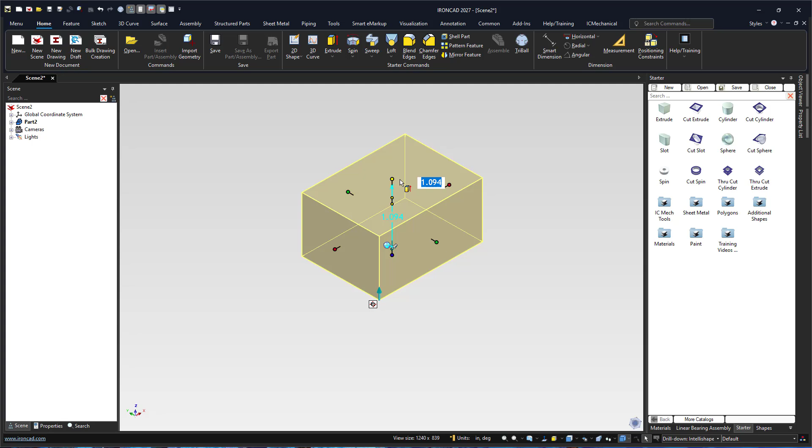Today we'll be continuing our IronCAD series where we're designing a linear bearing. Today we'll design our fourth part called the pillow block. To begin, we'll bring out an extrude block and we'll adjust the total length of this block to be 2 inches, the total width of the block to be 1.5, and the total height of the block to be 1.06. So this will give us the base.

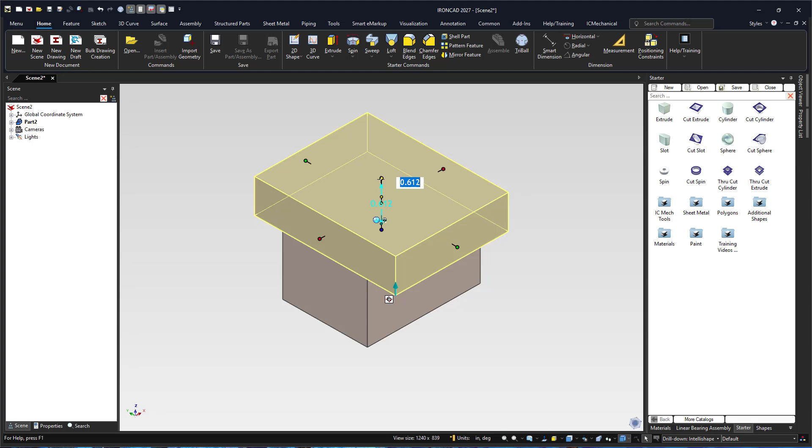And so what we'll do is we'll bring out an extrude block. We'll adjust the front and the back to be flush, and then we'll bring out this top block to be 2.5 inches, and then the total height will be 0.19 inches. So this will give us our overall base for the pillow block.

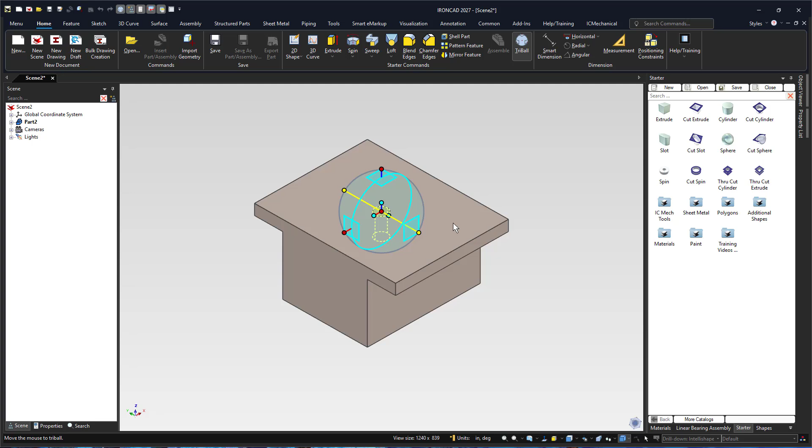What we'll do now is we'll go to the top view and we'll add a cut cylinder here. This cut cylinder needs to be 0.22 inches. We need 4 of them. So we'll move this hole to the correct dimension. We'll hit edit distance to point. So from this right side point, this hole needs to be 0.25. And then from this front face, this hole needs to be 0.25 as well.

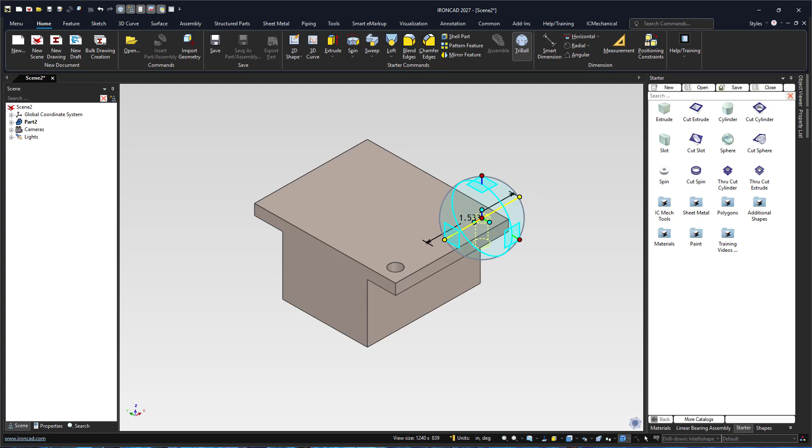And then what we'll do is we'll use the tri-ball. We'll hold the tri-ball in and we'll right click and drag. This hole needs to be copied at 1.5 inches. We'll take both of these, we'll bring down to the middle, and we'll mirror on the other side.

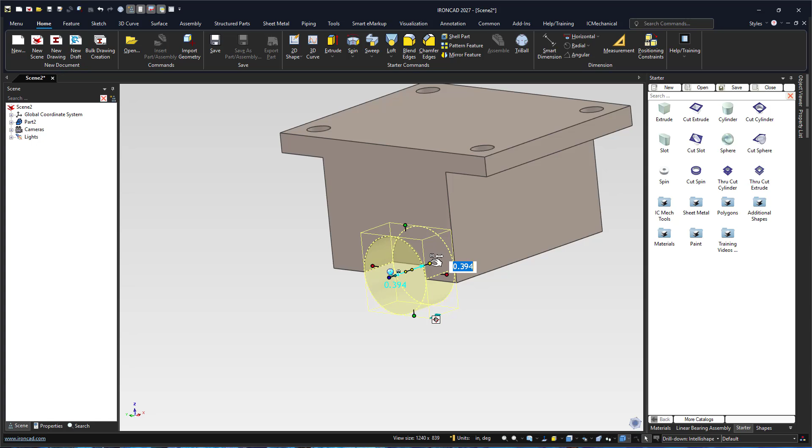Lastly, what we'll do is we'll add a cut cylinder here to this middle point. We'll adjust this cut cylinder to be 0.75 in diameter. We'll have it go all the way back to be flush with the back face. We'll open up the tri-ball, and from the top face, it needs to be 1.06. So just like this. So this is our pillow block.

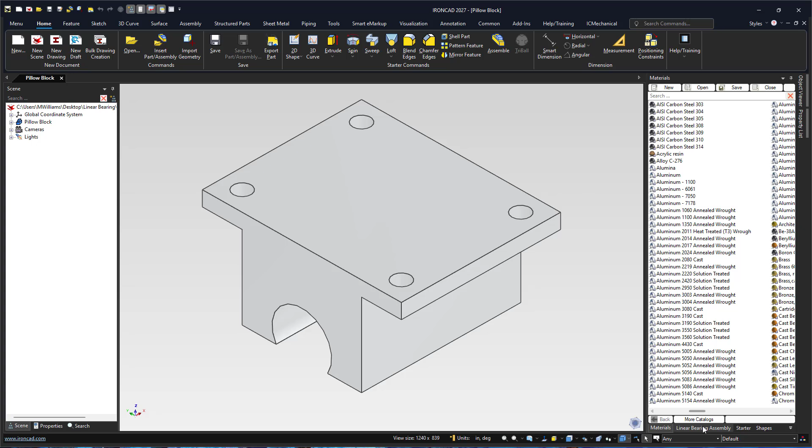We'll add the material. We'll have this to be aluminum 6061, and then we will leave it the same color. We'll adjust the name to be pillow block. We'll save this in our linear bearing folder, linear bearing, pillow block, save it. And then we'll have the catalog open. We'll drag this into the catalog. So this is our part.